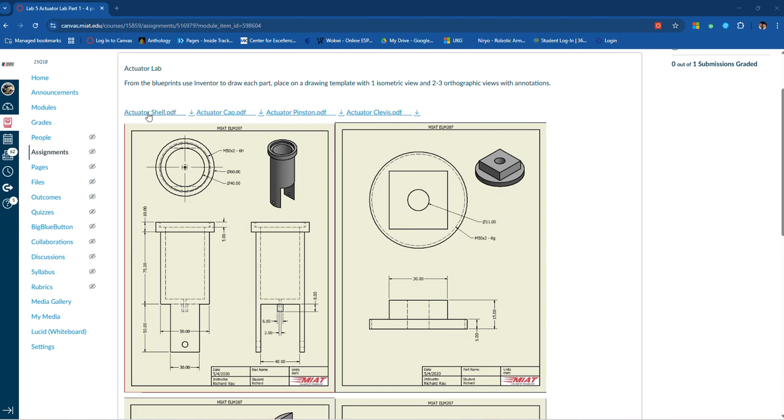Welcome to the Actuator Lab, a little help video for you, mainly on the shell. A lot of students have some difficulty with this, so we're going to go ahead and create the shell. Here it is, so I'm going to show you how to make it.

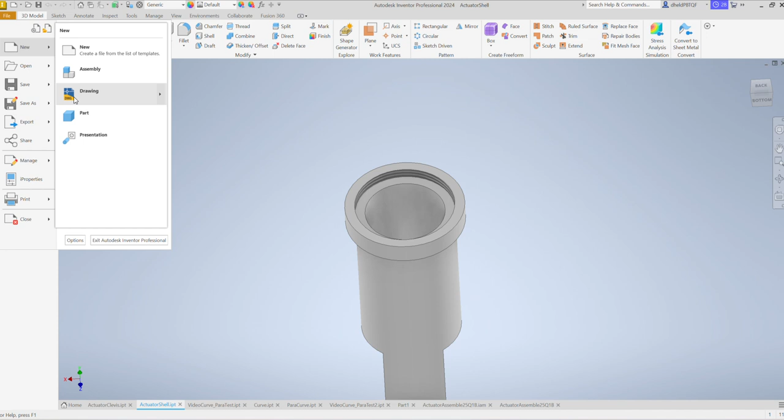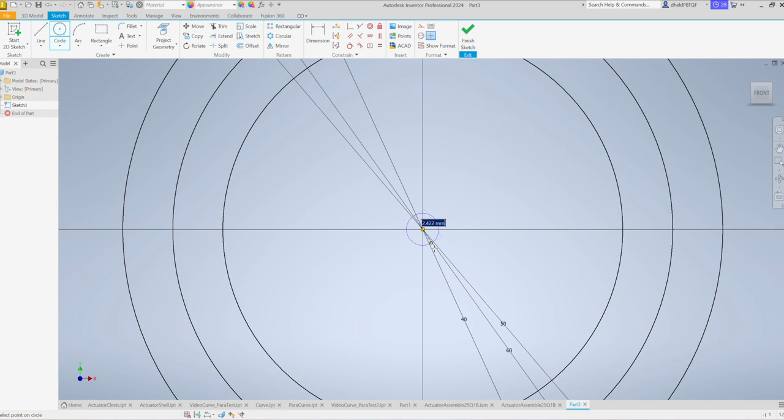I'm going to create a new part and put it on the XY plane. We're going to start with the drawing of circles. I'll draw a quick couple circles: 60, 50, 40, there's another little one that's 6, and one more that's just 2.

Alright, so I've got some circles made. I'm going to go ahead and click on these, press delete, and get them out of my way.

I'm also going to draw a line from here to here. It'll be 15. Yep, and I'll just bring it back. Oh, it's not letting me. So I'll draw another line from here to here, also 15. There it is.

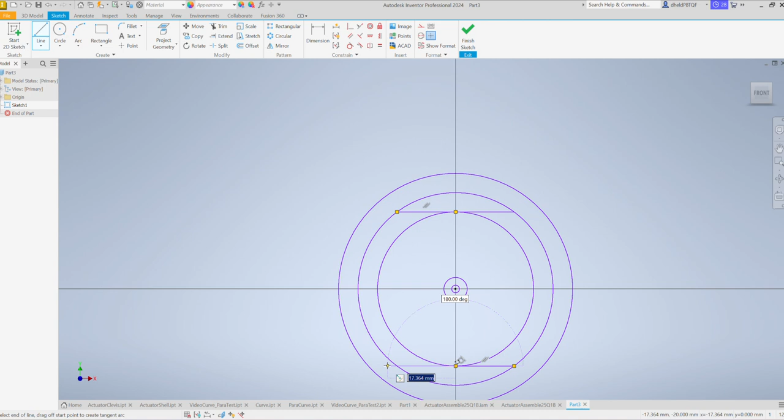And we'll do that down here. I could mirror it, but I don't have mirror line drawn, so one more time from here to here, 15. And there we go. I'm going to finish that sketch.

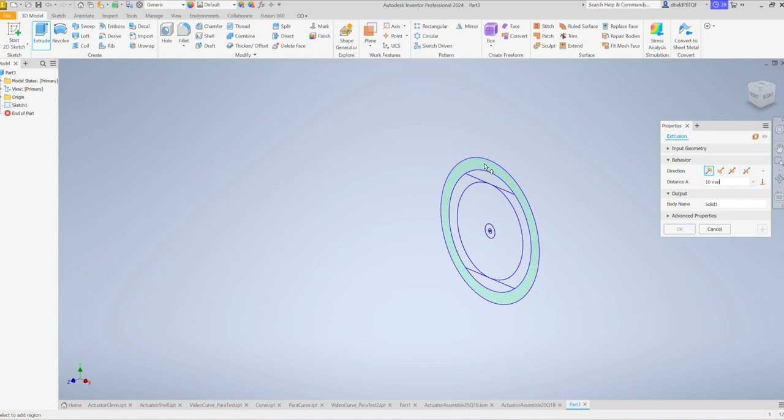Alright, so looking at the drawing, what I'm going to do is bring everything down using this plane right here. I'm going to bring this up and send everything down from this plane. For this first extrusion here, I'm going to bring that up 10.

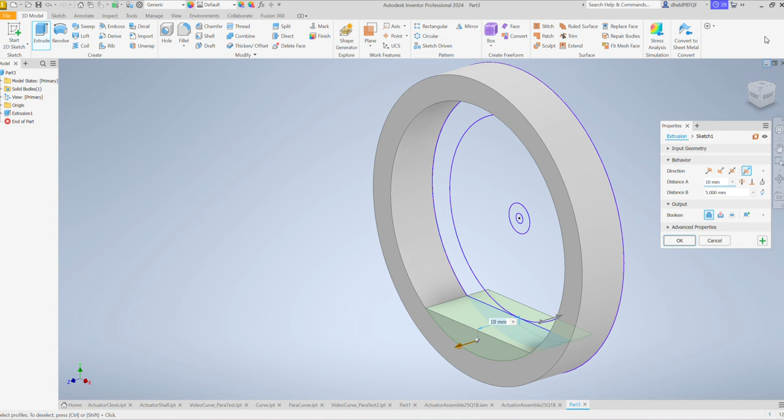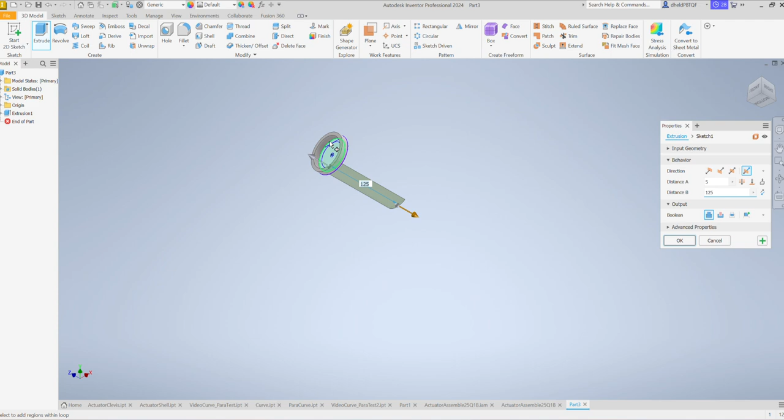Next, for the section that is the legs, see this straight portion right here? I'm going to make it an uneven extrusion, and I'm going to click right here. The portion that is 10, I'm going to make 5. And I'm going to make this portion 75 down, and then another 50, so it becomes 125. If I go down here, I can see this portion too, and that'll be the same.

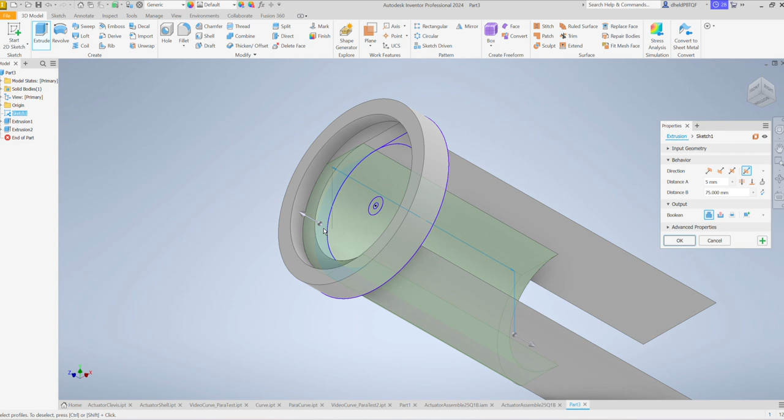Now I'm going to hit plus. I'm going to do the same thing, but instead of 125, it's going to be 75, and that is going to be right here. And if I click right here, and right here.

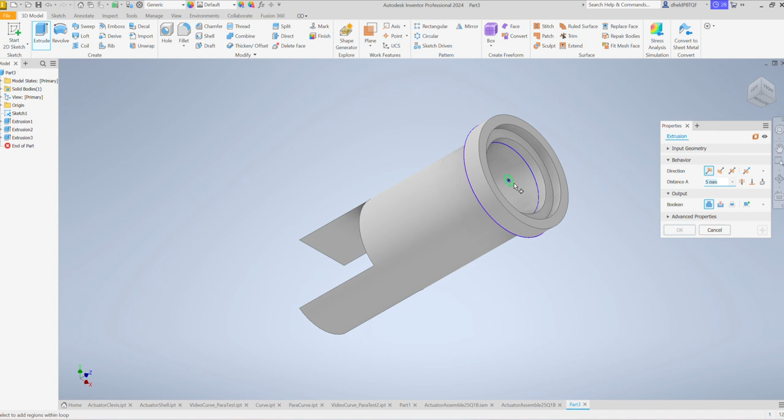Now I'm going to turn this around so we can see the back. You can see now this bottom is hollow. I don't want that, so I'm going to do a new extrusion, and I'm only going to take this one way, and do this portion right here. I'm going to turn it around, and that's going to go down 75.

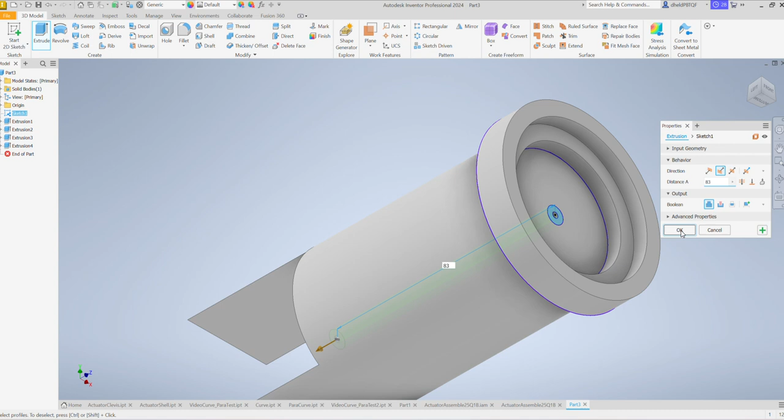I'm going to hit plus, and I got one more, this portion here. It's going to go in that direction, but it's going to be 75 plus 8, which is 83. I'll hit OK, and now I'm not quite done, but you can see I have that little piece on the bottom too. So I couldn't do it all in just one extrusion, I'm going to have to do another one, but it'll be real easy.

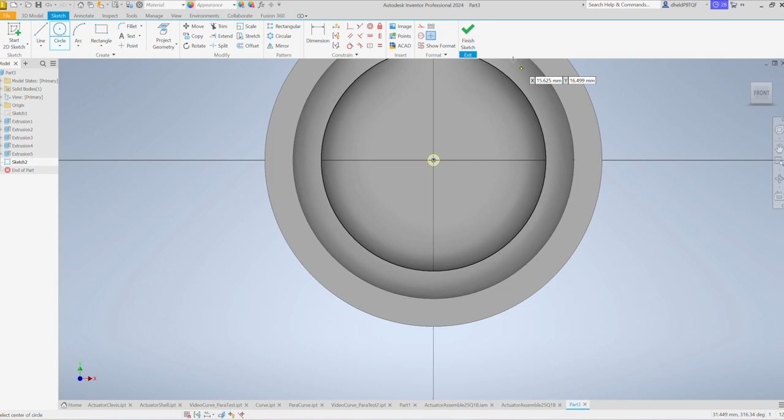I'm just going to start a 2D sketch on this plane right here, and draw a circle from the center and take it right to here, which is our 40. I'm going to finish that sketch. I'll extrude, but turn it around, and I'm only going to go down 70. Why 70? Because if this total distance here is 75, then these walls are 5 millimeters thick.

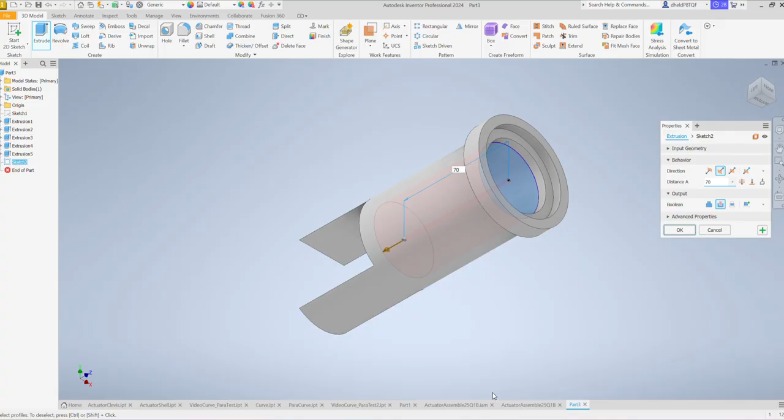That'll be 70, then I'm digging out. So I'm going to hit OK. And that's almost the part. Almost.

Now I'm going to choose my thread tool, and I'm going to put threads here, and I just need to make one little change here, make that by 2. And that is an M50 by 2. Let me look at the drawing one more time, make sure I'm not messing up here. A 6H, yep, and so that is right.

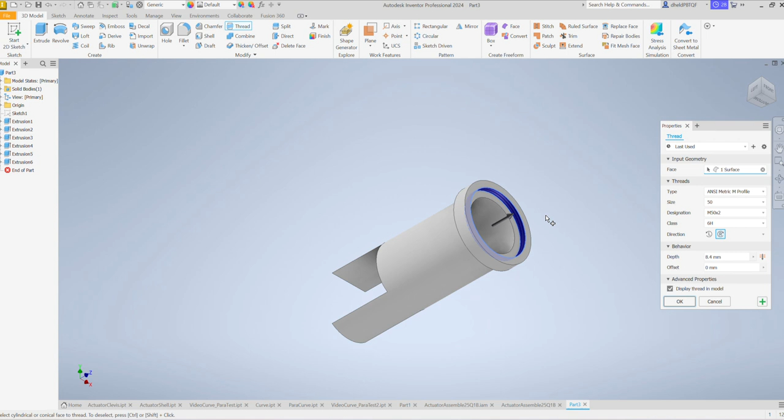So I hit OK. Just one more thing, I'll only do one of these holes. So I'll click on that. You can't click on the rounded part, but you can click the flat part. But now I can't really see, so if I click like that, now I want to take this—it's centered, so it's 15 on that measurement—and tab, and it's 8 to the center.

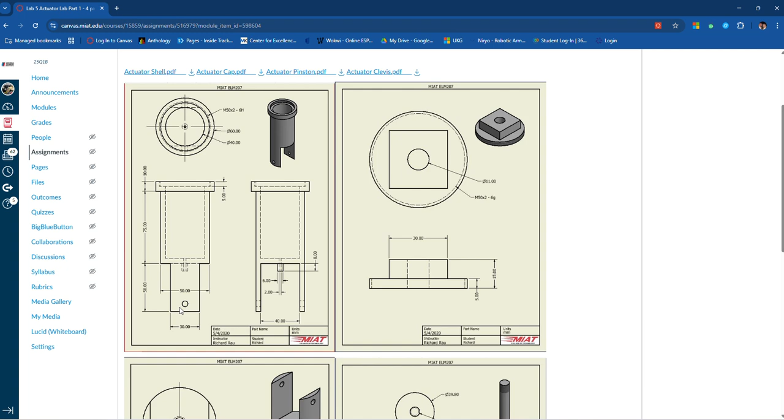How do I know that? Well, it's not really listed, but it matches the clevis. So this is just like the clevis, so I'm using the clevis measurement.

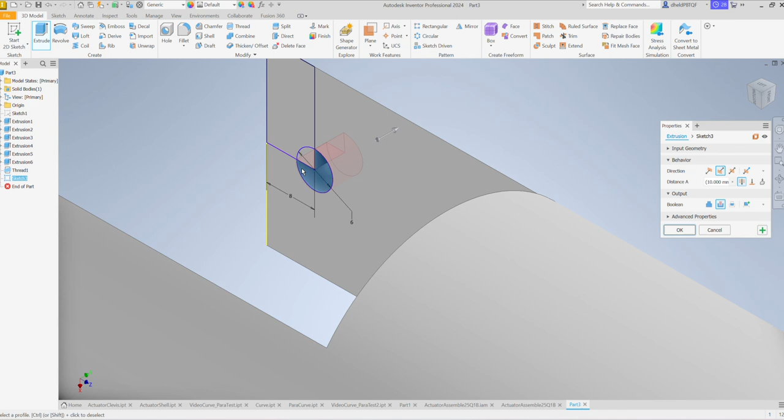So we're going to call that 6, that circle there. Hit escape, circle, right, starting here in this corner, 6, enter, finish sketch, extrude here, but we're going to back up through all and do this little corner too, and hit OK, and there's our hole. You can do that on the other side, and you'll be done.